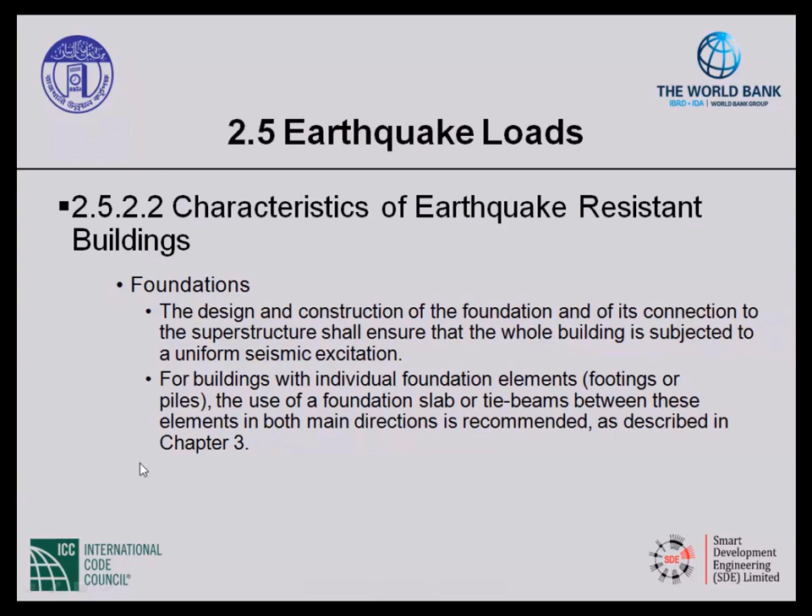Okay, regarding the earthquake loads, it is Article 2.5.3.1, in the site investigation article. It is clearly mentioned that appropriate site investigation should be carried out to identify the ground condition influencing the seismic action. Generally, for site investigation in Bangladesh, we generally practice or perform only SPT, standard penetration test.

When you consider any seismic activity or anything related to dynamics, you have to also carry out additional investigation, like PS logging, sometimes called the downhole method. Sometimes you have to also perform CPT, cone penetration test, as well as SPT, and also sometimes SCPT, seismic CPT. So all these along with SPT - SPT, CPT, seismic CPT, and PS logging or downhole - are required to establish the site parameters to make the modeling for the soil part.

Generally for buildings we model, but for soil you need to also model. You can perform one-dimensional modeling, or 2D or 3D modeling, depending how much data you have. For one-dimensional modeling it's very common to use the program called Shake, and for 3D model generally we can use Plaxis 3D. There are other software also, but these are very common for modeling soil behavior. The input required is generally obtained from SPT value, CPT value, seismic CPT value, and downhole or PS logging parameters.

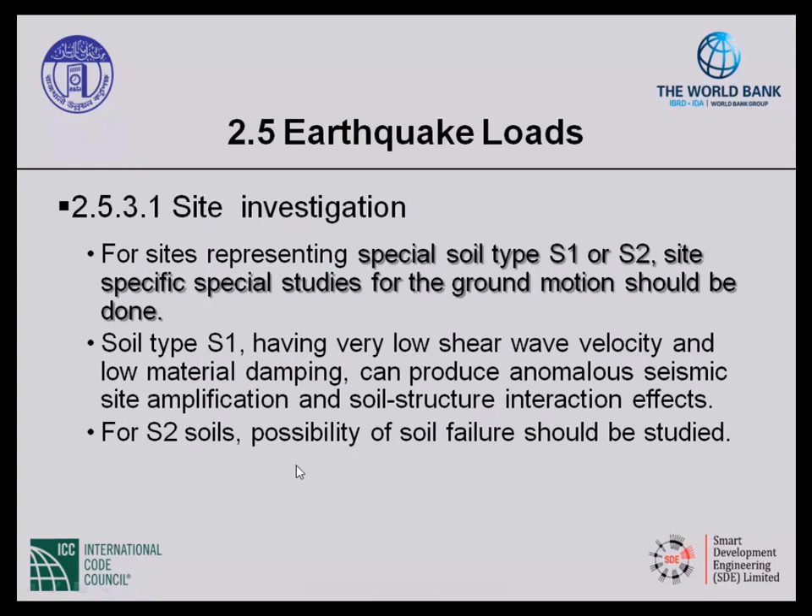In site investigation, for a structure belonging to seismic design category C or D, which is related more with structure, as mentioned in article 2.5.5.2 on seismic design category C and D, site investigation should also include determination of soil parameters for the assessment of the following. For category C and D, later we'll see that for Bangladesh, almost 70-80% of the country will fall in C and D category according to article 2.5.5.2. So for those, you need to perform the following.

You need to perform slope instability and liquefaction potential assessment. Differential settlement has to be assessed, surface displacement due to faulting or lateral spreading if faulting is present, and lateral pressures on basement walls and retaining walls due to earthquake ground motion. When you design basement walls, you have to consider the lateral pressure and also the earthquake ground motion to assess that.

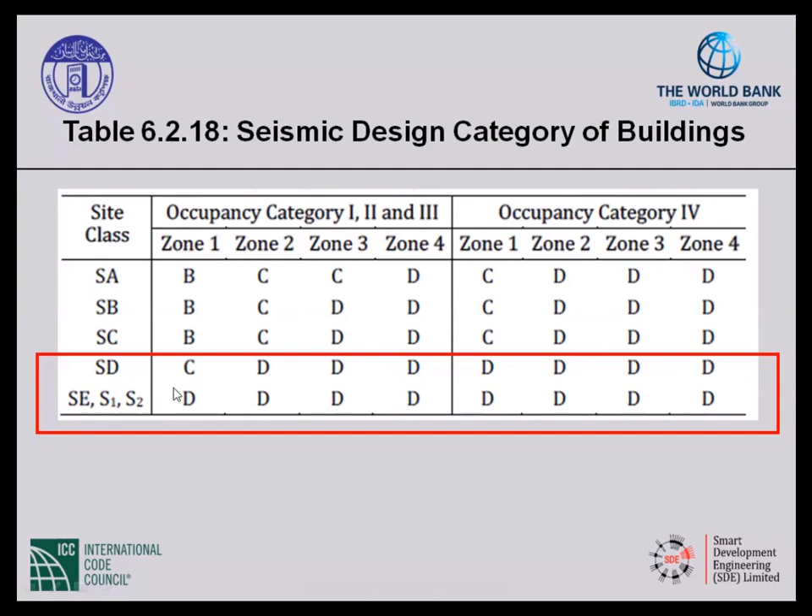If you look at the seismic design category of buildings, you'll find that for all site class types, the last two lines for all occupancy categories show that C and D type are recommended. That means the steps mentioned - site investigation should include determination of soil parameters for assessment of slope instability, liquefaction assessment, differential settlement, surface displacement, and lateral pressure on basement walls - have to be ascertained or determined.

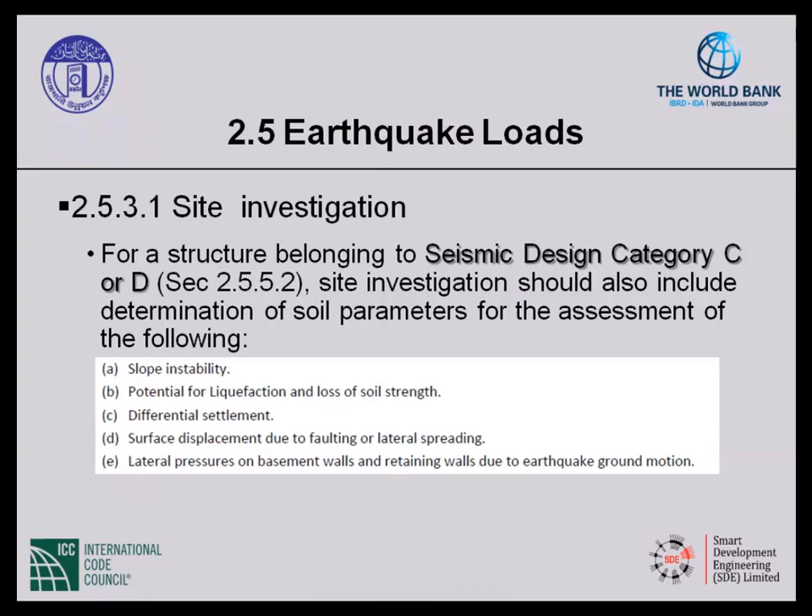For earthquake loads, it is clearly mentioned that liquefaction potential and possible consequences should be evaluated for design earthquake ground motion consistent with peak ground accelerations. So it is clearly mentioned.

But as I mentioned, the building code does not clearly specify what the surface PGA will be. They have only mentioned the 2,475-year return period ground motion in the rock. But sometimes you also need to get the return period PGA value of rock at 475 years, and sometimes you need to estimate the PGA value of rock at 200-year return period. So I will also try to show you how to ascertain or obtain these values from earthquake data, for 200-year and 475-year return period PGA values for rock sites.

It is also mentioned that any settlement due to densification of loose granular soils under design earthquake motion should be studied. That means sometimes due to liquefaction, the soil will settle, so you have to take some measures to improve that ground as well.

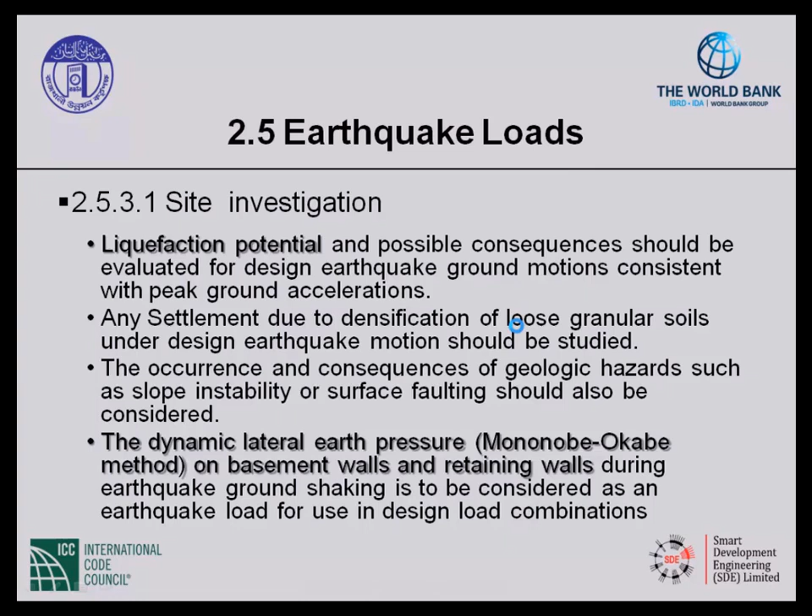Okay, next comes site classification. This is also discussed, but I will discuss this because it will be required for this part of the presentation. The site will be classified as type SA, SB, SC, SD, SE, S1, and S2. Based on the provision of this section, classification will be done in accordance with table 6.2.13.

This is based on the soil properties of the upper 30 meters of the site profile. In many countries, and in Bangladesh as well, probably a couple of years back, people used to perform shear velocity measurements only up to 30 meters, obtaining VS30.

There are two methods to estimate site amplification or site response analysis. One method, which is a little easier, uses the average shear velocity for the top 30 meters to directly estimate the site amplification factor. But many times it has been found that the VS30 value obtained from the top 30 meters does not always give the proper site amplification value at the surface.

So sometimes, for deeper sedimentation layers, you need to perform shear velocity measurement up to at least a shear velocity of 400 meters per second. In Dhaka and many regions, this layer exists up to 200 or between 200 to 300 meters depth. In other regions, like Padma Bridge site or Rooppur power plant site, this layer of 400 meters per second or more exists below 120 meters.

In Dhaka it varies from 200 to 300 meters, but in other regions it varies depending on the location of the engineering bedrock. In Bangladesh's building code, BNBC, rock soil is defined as having shear velocity greater than 800 meters per second. But when we consider engineering bedrock, it is generally defined for residential buildings.

Engineering bedrock is defined as existing at around a shear velocity level of 400 meters per second or more. But for a power plant, it is generally defined based on 600 meters per second, because the real rock is very deep. Achieving the real rock, meaning the shear velocity of real rock, consumes a lot of time and investment, so sometimes engineers do not go up to the rock. They prefer engineering bedrock, which is defined in many classifications and reports all over the world.

For residential buildings, engineering bedrock is defined as 400 meters per second. For important structures like power plants, it is defined as 600 meters per second. For other structures like bridges, it is defined as 500 meters per second. So there is some difference between the engineering bedrock and the rock defined in our code.

Now the following equations are generally used to estimate the average shear velocity. When performing the shear velocity calculation from the top 30 meters, we need to follow three criteria: first, average shear velocity determination; second, average SPT value determination; and last, average undrained shear strength determination.

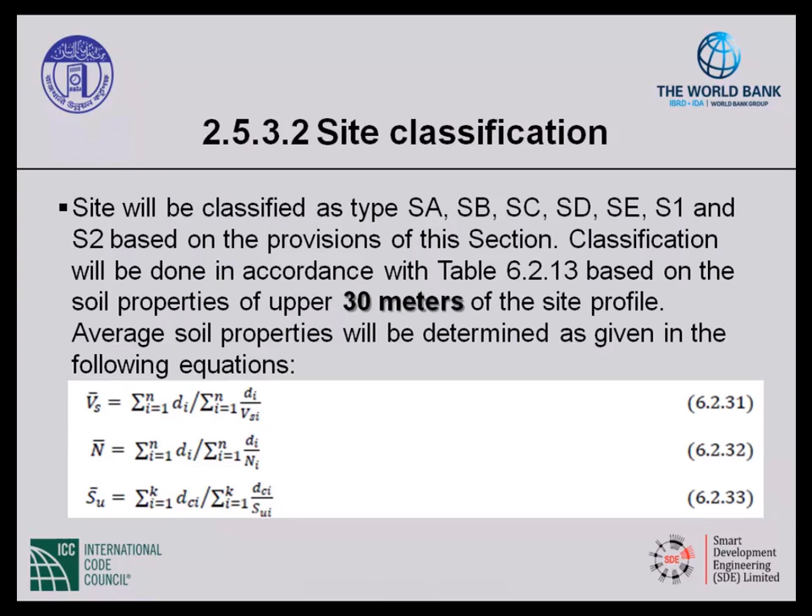For site classification, the site profile up to a depth of 30 meters is divided into n number of distinct soil or rock layers, as mentioned in the equation. Some layers may clearly mention whether cohesive layers exist within cohesionless soil, and how to handle that. But it doesn't matter, because whether it is cohesionless or cohesive soil, you have to determine the shear velocity layer by layer.

Generally, we perform shear velocity or downhole method measurements at each 1 meter, but most of the time it is performed at each 2 meter level. If you have the money and time, then you can perform it at each 1 meter.

We can segregate the sand layer and cohesive and cohesionless soil layer, and average the value. The standard penetration value N is directly measured in the field without correction, and the average SPT-N value, calculated using those equations, does not need any correction. That is what the code recommends.

The site classification should be done using average shear wave velocity VS bar for the top 30 meters, if this can be estimated. If you cannot go up to 30 meters, there are other methods recommending how to estimate 30 meters from other values. That means if your equipment cannot go beyond say 20 meters, then how to extrapolate up to 30 meters. There are lots of papers and methods mentioned, so you have to search the literature, but the code does not clearly mention this.

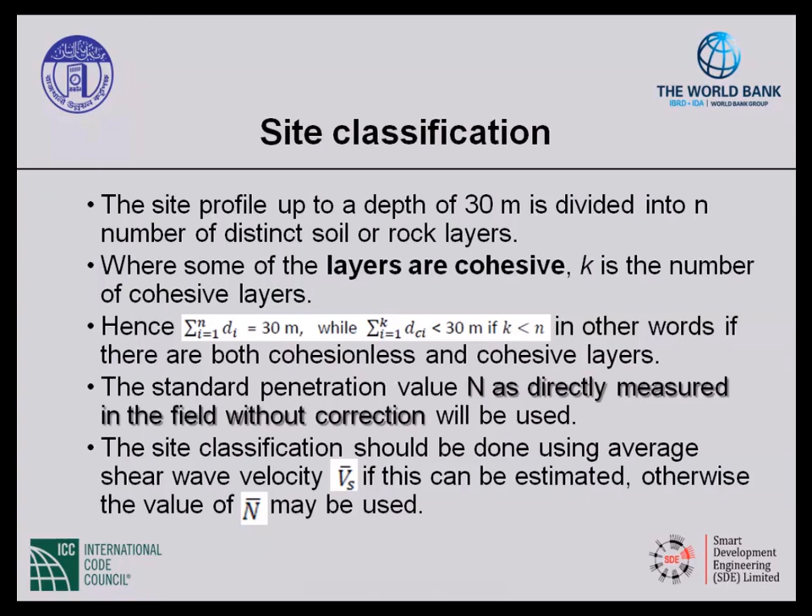Since to perform site classification and PGA value estimation we need the shear velocity, and since this is an important project, we have also carried out PS logging for the site.

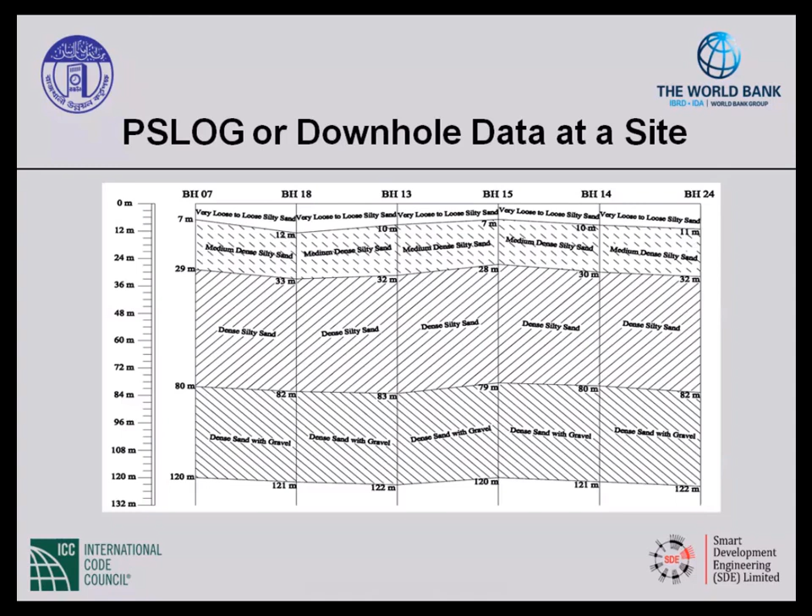But still we prefer to go up to 600 meters per second since it's a power plant project. So we have carried out shear velocity measurement up to a depth of 125 meters.

For this site, we have carried out VS30 based site amplification, and also site amplification based on shear velocity up to a depth of 125 meters. We found that the VS30 based site amplification value is much smaller than using the 125 meter VS shear velocity profile to assess the site amplification parameters.

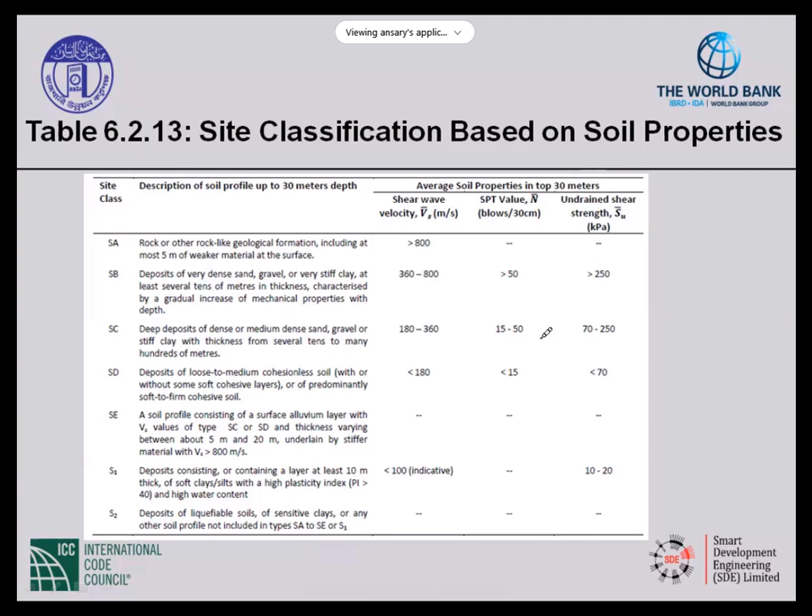Okay, then if we move to the total historical earthquake studies, because in the BNBC it is also there in the appendix. It has been clearly mentioned what our historical earthquakes are. But over here, just to show...

The major earthquakes in Bangladesh are basically the 1762 Chittagong earthquake, which also caused a tsunami in the Chittagong-Arakan region back in 1762. That is one of the largest historical earthquakes, which happened almost 250 years back. But this kind of earthquake generally occurs once every 300 years. So since it happened in 1762, probably it will happen again around 50 years later.

But the smaller earthquakes like the 1869 Cachar earthquake, the 1885 Bengal earthquake, the 1918 Srimangal earthquake, the 1923 Durgapur earthquake, or the 1930 Dhubri earthquake, which are around magnitude 7, can happen every 100 to 150 years. So the return period for this kind of earthquake is generally 100 to 150 years.

But all those earthquakes which are larger, greater than magnitude 8, generally have a return period of 300 years. Like in 1897 - if we say it happened around 1900 - then the next large earthquake, the probability of occurrence, is probably around 2200.

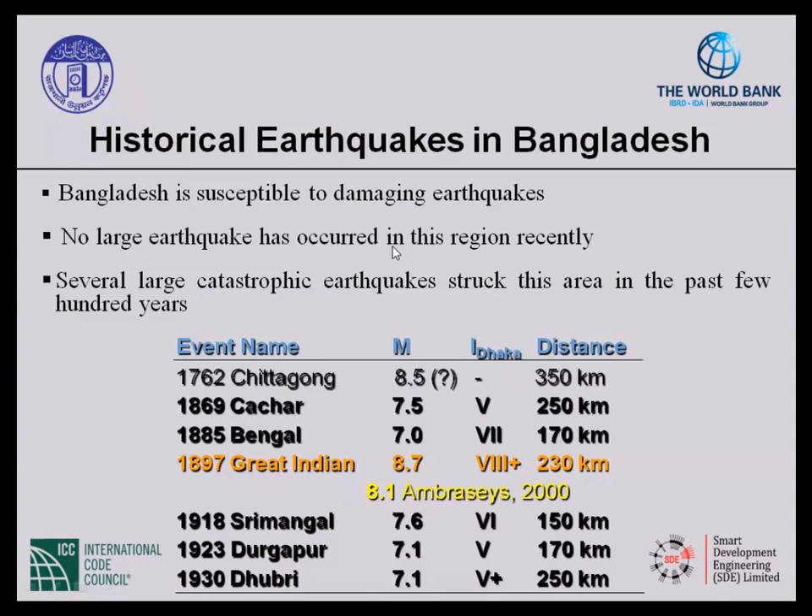Okay, so these are all the large earthquakes in and around Bangladesh. Many of you may wonder that most of these earthquakes are lying outside Bangladesh. But if you see more minutely, you will find out that there are at least 10 earthquakes having a magnitude between 6 and 7 which lie within Bangladesh.

And most of these occurred a long time back. So for the last probably 100 years, no larger earthquakes have happened in Bangladesh. But smaller level earthquakes - we do not have much data on these within our country.

One of the reasons is we do not have adequate equipment. Although the Bangladesh Met Department installed probably 4 equipments in 2001, out of those 4, at least 2 are out of order.

So they cannot exactly pinpoint, like the recent Sylhet earthquake - they cannot exactly pinpoint the location of those earthquakes. So we have to rely on the United States Geological Survey, or we have to rely on the Indian Met Department to locate those earthquakes.

But at the international level, if you search the database of the International Seismological Center, or look at the USGS website - since we do not have sufficient seismometers, although we have 4, 2 are out of order - the smaller earthquakes happening within our country are not measured that well.

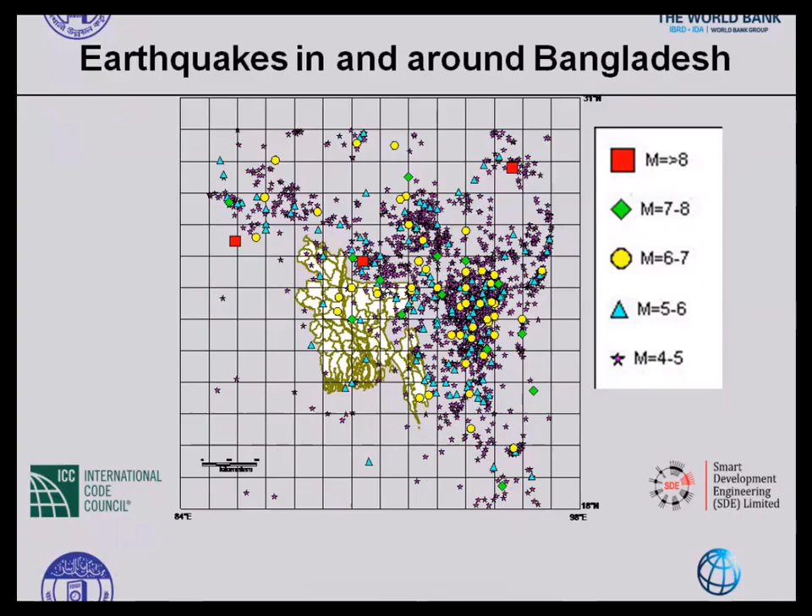The first one, where we are estimating the magnitude value for that particular Sylhet site, we have to gather all the earthquakes within the 300-kilometer radius, and we have to make a correlation between magnitude and occurrence rate.

That means we have to first consider, say, our database within a 300-kilometer radius has 150 earthquakes. Within those 150 earthquakes, we have to segregate how many are between 3 and 4, how many are between 4 and 5, how many are between 5 and 6, how many between 6 and 7, how many between 7 and 8, and how many greater than 8.

Next comes section 2.5.4.2, seismic zoning. In our code, it is clearly mentioned that the intent of the seismic zoning map is to give an indication of the maximum considered earthquake motion at different parts of the country. In probabilistic terms, the MCE motion may be considered to correspond to having a 2% probability of exceedance within a period of 50 years.

So generally, the basic equation — I don't know whether I can write it or not — the probability equation equals 1 minus e to the power of... it's very difficult to control this WebEx thing. I will write it here.

Probability equals 1 minus e to the power minus nu t. This nu is the occurrence rate. Although it is mentioned 2% probability in a period of 50 years, this 50 years is basically t.

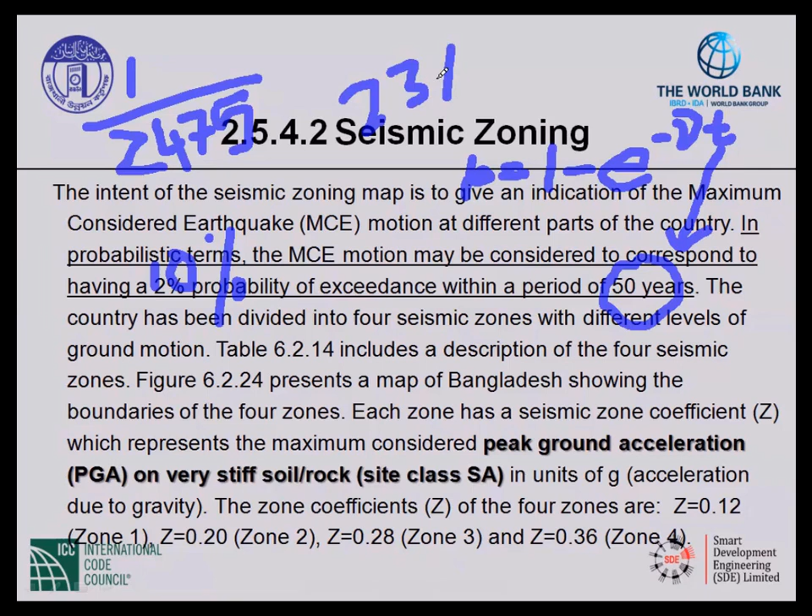Similarly, if probability is 10% in a design life of 50 years, it is 475 years. If we put probability value of 23%, it means a return period of 200 years. So 2% probability of exceedance means 2475 years, 10% probability means 475 years, and 23% means 200 years return period.

But for a design life of 50 years, for the structure we are designing, we assume its design life will be 50 years. So for any return period, we can always convert to the probability of exceedance using that particular equation.

In our code it is clearly mentioned that the intent of the seismic zoning map is to give an indication of the maximum considered earthquake at different parts of the country. In probability terms, this MCE may be considered to correspond to having a 2% probability of exceedance within a period of 50 years, which means 2475 years.

Each zone has a seismic zone coefficient Z value, which is basically the PGA value at the rock, representing the maximum considered peak ground acceleration on very stiff soil or rock, classified as SA type, in units of G, and it is always expressed in percents of G.

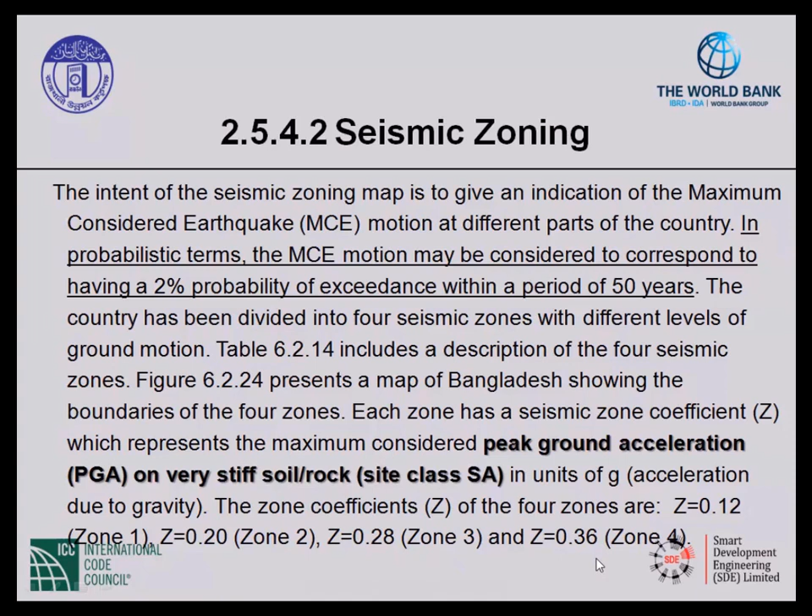The zone coefficients of the 4 zones are Z equal to 0.12 for zone 1, 0.2 for zone 2, 0.28 for zone 3, and 0.36 for zone 4. But all of them have to be multiplied with a factor of G, since they are expressed with respect to G value.

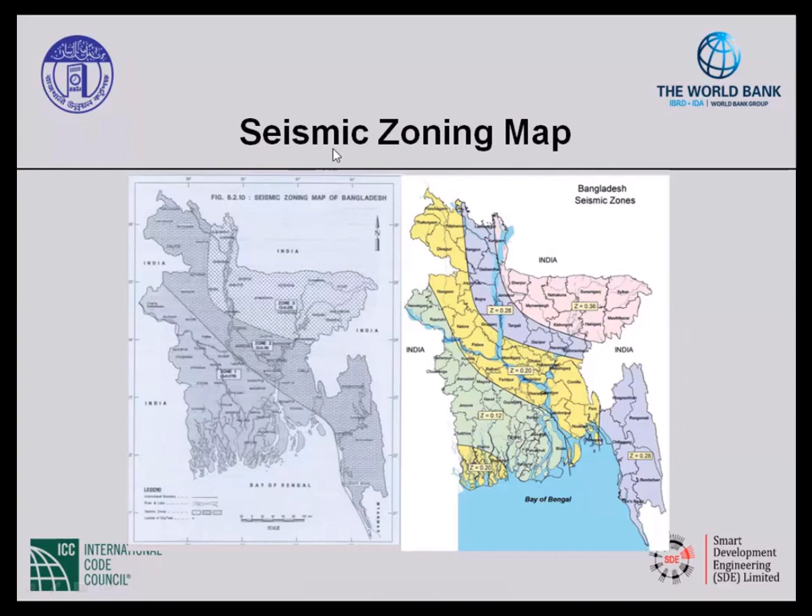It is also mentioned, as noted, table 6.2.14 and the design response spectra are important because we need to estimate them. These are design spectra and other spectra that are defined, but we need to modify them if we want to estimate or develop the time history data for a particular site. We need to first identify which response spectra we have to use.

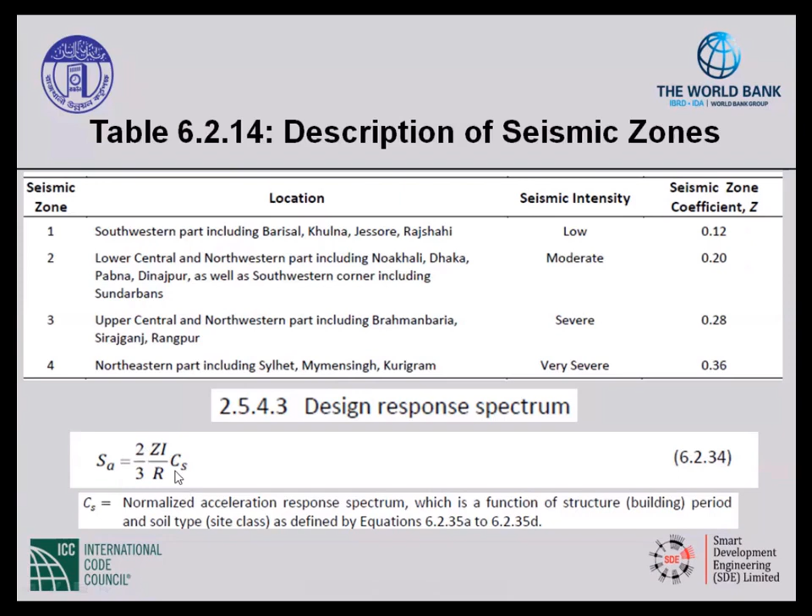For this, the shear wave velocity profiling or site classification is essential. These are already discussed by Dr. Ghosh and others, like the Z factor and importance factor are another issue. I will describe in more detail. First, I will go into the response spectra curve, then come back here.

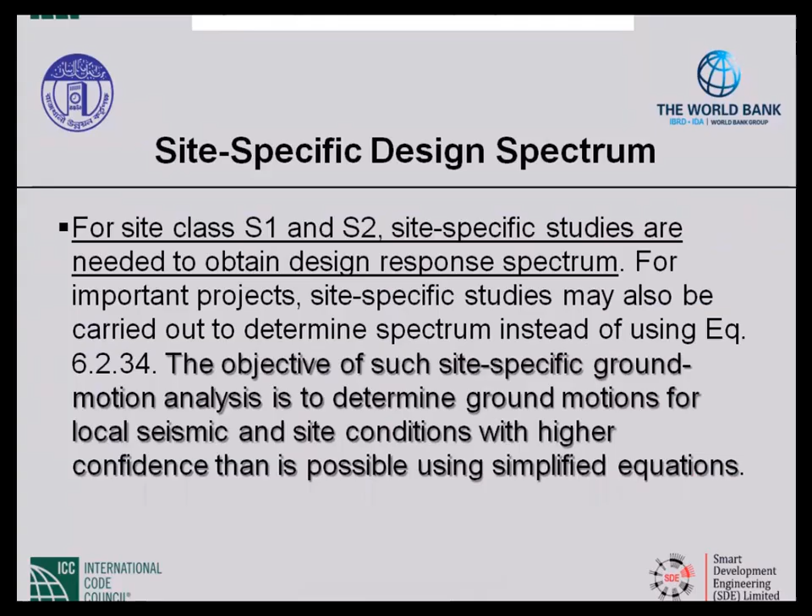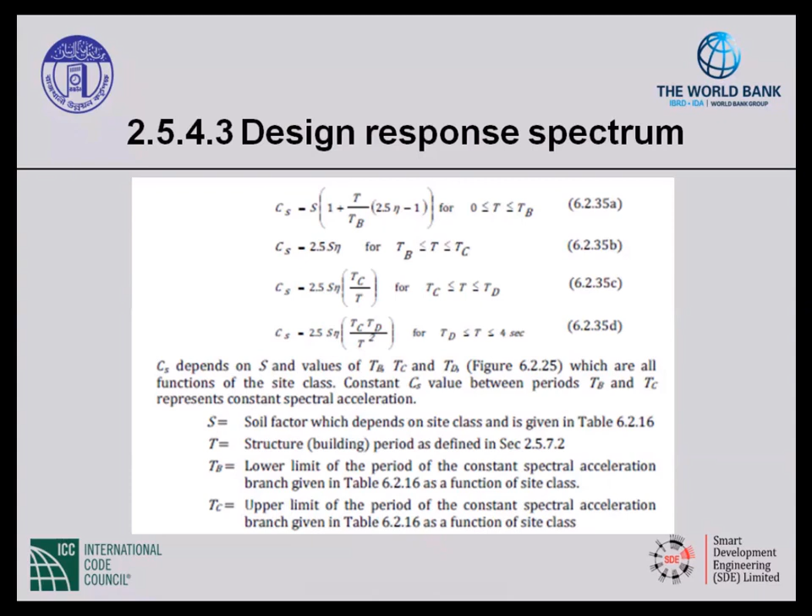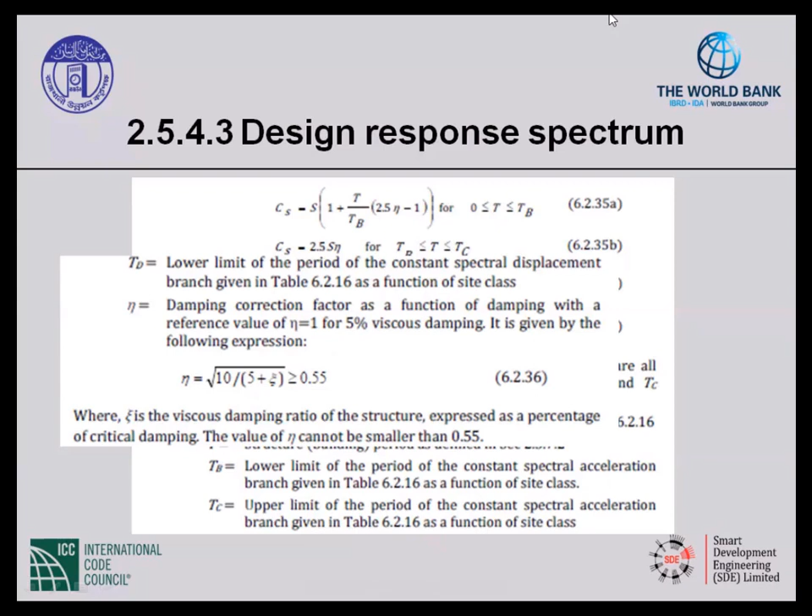The soil factor provided in Table 6.2.16 is there, and T of structure for that value is also provided there. But using these 4 equations, you can estimate it, and all these are only applicable for 5% damping. It's clearly mentioned because for structures we generally use or prefer 5% damping, and for 5% damping, the η value is 1.

The η factor provided in this equation can be assumed as 1, since we always use 5% viscous damping for our structures. It is very common practice. So these 4 equations can be used.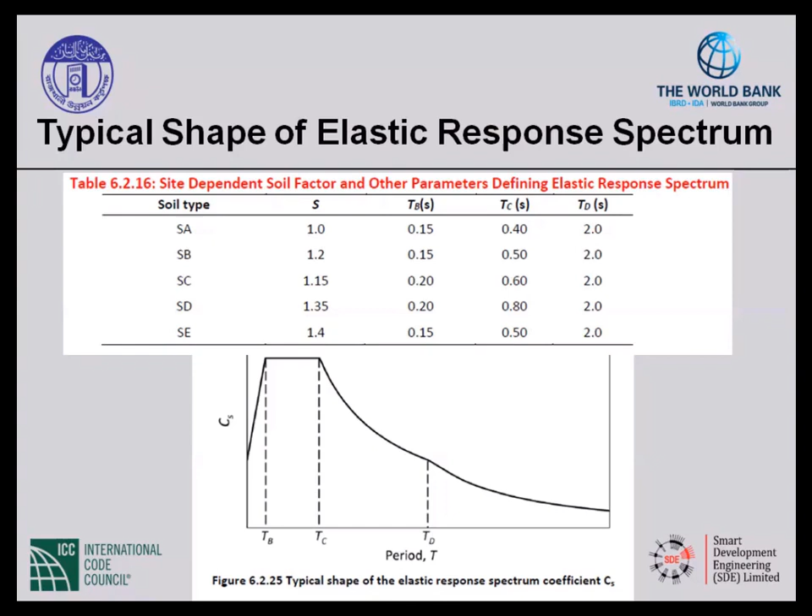For other structures, we can use the SA, SB, SC, SD parameters, where S is the soil factor, and TB, TC, TD are already provided in the curve below, representing the typical shape of the elastic response spectra. From this, we can get these 4 types of response spectra.

But here the value given is a normalized value, like spectral response divided by PGA rock. That PGA rock value comes from our building code seismic zonation map.

Then you have to multiply with the normalized value to obtain the SA, SB, or SC value. The site classification is already defined by shear wave velocity, and using the VS30 value, you can estimate whether the site falls under SA, SB, SC, SD or SE type, and multiply accordingly. Say our site falls in SC type, then you multiply that normalized curve with the PGA rock value, and you get the response spectra for that particular location.

But how to generate the time history for the location is not clearly defined in our code, though sometimes you need to obtain time history data for a particular site. The basis is that curve I mentioned—you multiply SC with PGA rock to get the response spectra for the site, and using that curve, you generate the time history data, as shown in this curve. There are lots of methodologies, techniques, and software available nowadays to develop this.

Especially here, there are about 2 software options available in the market that you can use.

One is earthquake risk software, developed by Berkeley or other universities in the USA, and there is also software called Seismosoft. You can also use that one.

So the target ARS, target acceleration response spectra, is what I mentioned. We can estimate it by multiplying the PGA rock from the building code curve, which is 6.2.26 for SC, and that will be our target acceleration response spectra.

And achieved ARS we have to fit. Using the target acceleration response spectra, the middle one is the target, the upper one is +1 sigma, the lower one is -1 sigma. The achieved ARS is obtained using software, by trial and error, to get a response spectra which matches the target response.

In between, we generate the earthquake time history, because to obtain a response spectra we first need the earthquake time history, and using that time history you can generate it using FFT, fast Fourier transform, or other numerical methods to generate the response spectra.

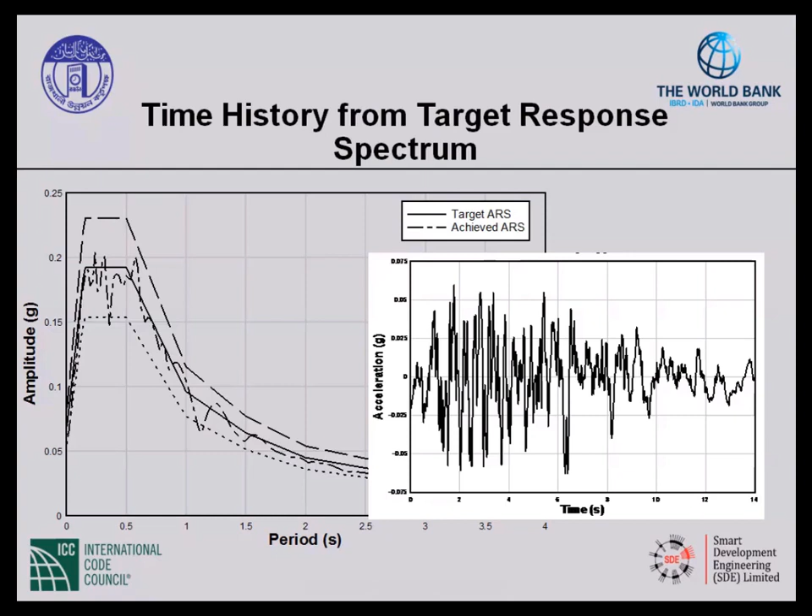So here, to generate that particular response spectra, this is the time history, and when you match these two, they are shown. The black one is the synthetic time history, because using response spectra we can use two methods.

One is using synthetic time history, meaning we can assume parameters for our local soil and local fault mechanism to generate the synthetic earthquake time history, and then match it back to the target.

Again, there are other methods where we can directly use real earthquakes, very famous ones like the Kobe earthquake, the Chichi earthquake, the Kocaeli earthquake, or the Northridge earthquake, and use that real earthquake data to match the target response.

So there are two methods: one is generating a synthetic earthquake for your own country using the fault mechanism, and the other is using real earthquake data to achieve the target response. But both methods end the same way, meaning you have to achieve the response spectra which matches the target response.

So this yellow color one is the matched one, and that will be used for your modeling for building design.

Next comes dynamic ground stability or liquefaction potential for foundation soil, covered in article 3.9.5. Everything else has been explained in detail, but I think this particular article 3.9.5 has not been touched upon, so I'm trying to explain dynamic ground stability or liquefaction potential for foundation soils.

Soil liquefaction is a phenomenon in which a saturated sandy deposit loses most of its strength and stiffness due to generation of excessive pore water pressure during earthquake-induced ground shaking. Total stress, effective stress, and generation of pore pressure have already been explained in detail, so I won't go into that.

Just remember, the two preconditions for liquefaction are: the soil generally needs to be sandy in nature or cohesionless in nature, and second, the water table has to be very close to the surface. These two are prerequisites for generation of liquefaction.

If you have a site with this condition, and you think a significant earthquake will be generated, you need to study the liquefaction analysis. Also, in our recent 2020 code, it is clearly mentioned that for soil type C and D, you have to assess the liquefaction potential.

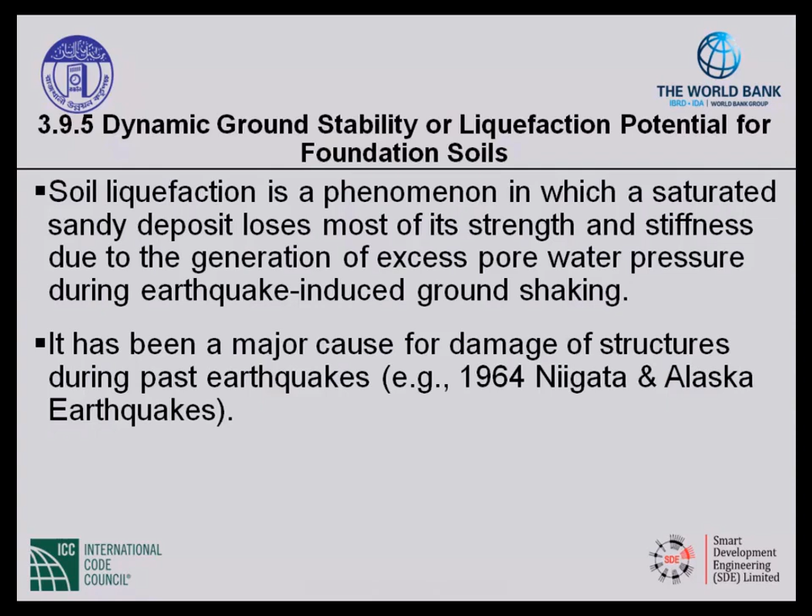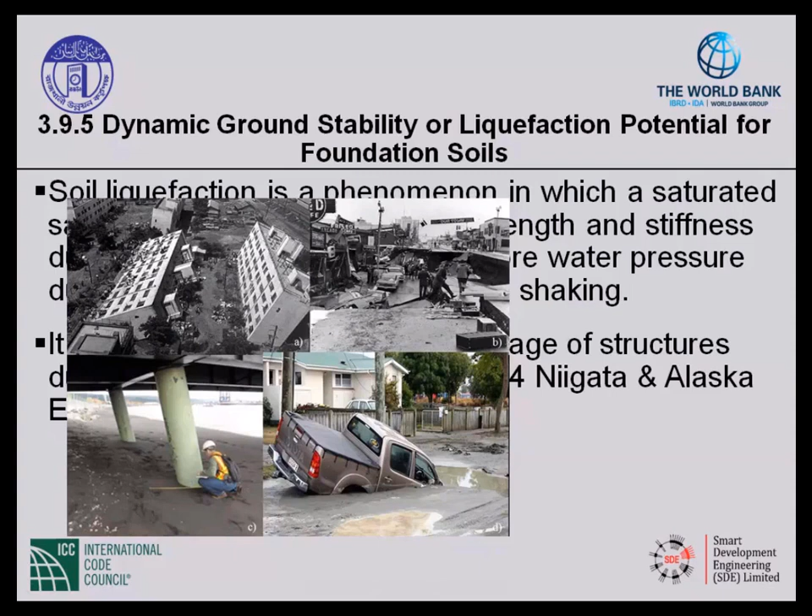In many of these locations, you can see people standing where liquefaction occurred. In liquefaction, the soil behaves as a liquid, and the sandy soil, showing very low shear strength, caved in. You have to be careful wherever you find sandy soil, generally found near river banks where recent deposits are located. Near the river, the water table is also very shallow, so these two conditions are prerequisites for liquefaction.

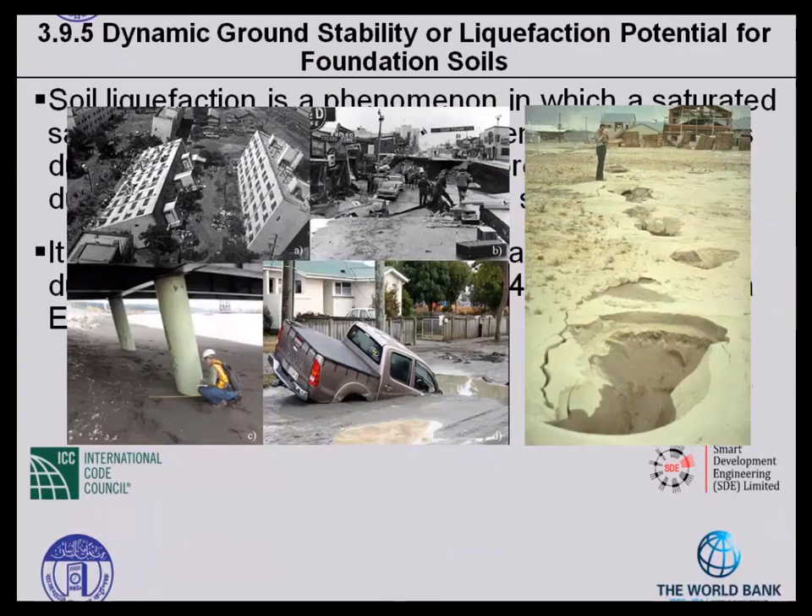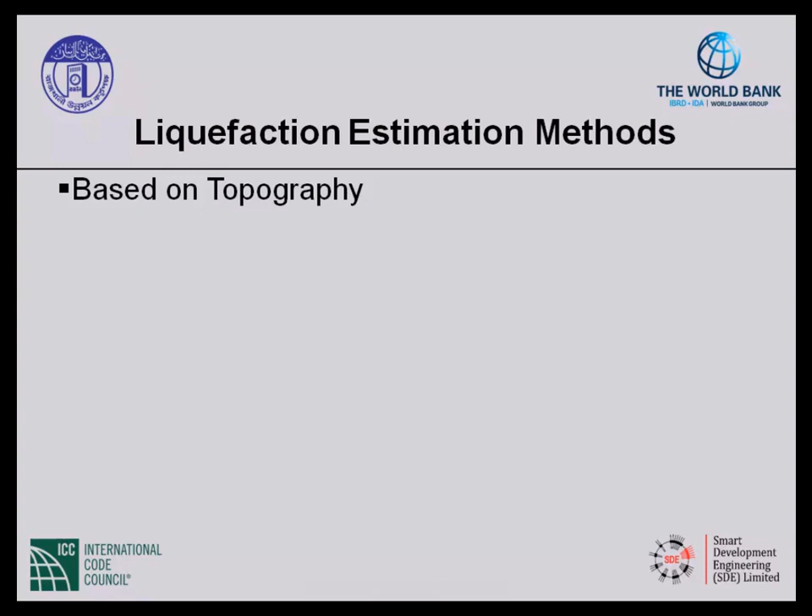If we do not have any money, liquefaction assessment can be done in many ways. If you do not have enough money, you just try to collect data from the topography and estimate liquefaction based on a topographical survey. Areas with high potential to cause liquefaction include where older river beds are, where present river beds are located, because those carry alluvial silts and sands, and lowlands between dikes with high water table, and filled lands or reclaimed lands.

Filled land and reclaimed lands mean areas where we fill ground, like government projects and private projects, many projects in Dhaka city. If you go to Google Earth and search, you will see lots of locations showing white colors. Those are all potential sources of liquefiable areas, because those areas are generally filled with reclaimed sand, using dry sand from the river.

Other areas are less vulnerable to liquefaction, and terrace hills have almost negligible or low liquefaction potential. So areas with high potential are important to us, especially older river beds, present river beds, lowlands between dikes, and filled or reclaimed areas. If we identify those areas from survey, we can say these locations are potential sources of liquefaction.

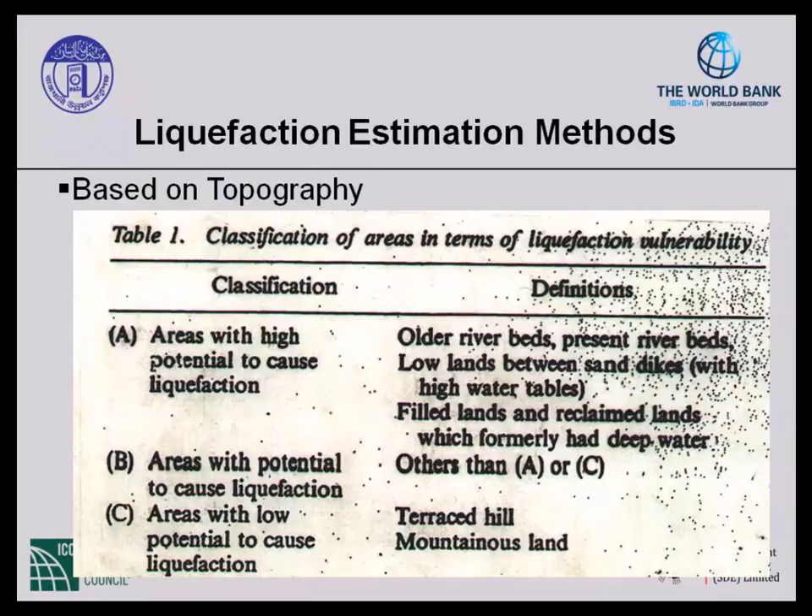If we have more money and project funding, then we perform more studies and liquefaction assessment. The most important general liquefaction procedure was provided by Professor Seed and Idriss back in 1982.

They observed in their literature, over the last 25 years from 1982 and backwards, that a procedure termed the simplified procedure has evolved for evaluating liquefaction resistance of soil. This procedure has become the standard of practice in North America and throughout much of the world. We are still using it as one of the methods.

But when we use one method, it may be sensitive to some parameters. So generally, for liquefaction analysis, we use 2 to 3 methods to compare. Three methods are very popular: we will describe the Seed and Idriss method here, but you also need to know there is one method by the Japanese Societies of Soil Mechanics and Foundation Engineering, and another method proposed by Chinese researchers, called the Chinese method.

It is also in their code. So generally, when we perform liquefaction analysis, we always compare three methods: Seed and Idriss, the Chinese method, and the Japanese method. One is US based, one is Chinese based, and one is Japanese based, because these three countries are more prone to liquefaction, having more earthquakes than other countries.

So although I'm showing only one method, when you use this in the real world for consultants or other projects, you always need to compare three methods, so you know the sensitivity or limitations of the other methods also.

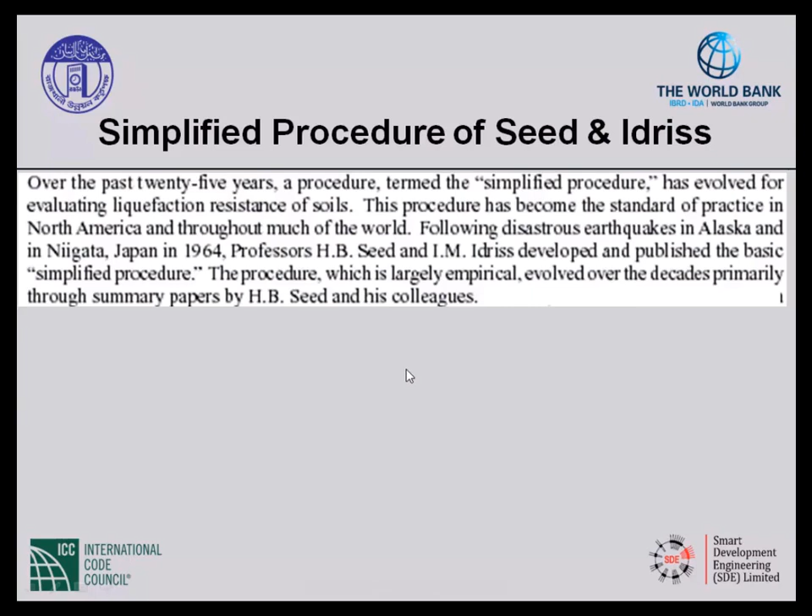The procedure, which is largely empirical, evolved over the decades primarily through summary papers by H.B. Seed and his colleagues. They clearly estimated the factor of safety for liquefaction potential, defined as R over L, where R is the in situ resistance of soil, expressing the capacity of the soil to resist liquefaction, sometimes called CRR. And L is the earthquake load induced by seismic motion, defined by CSR.

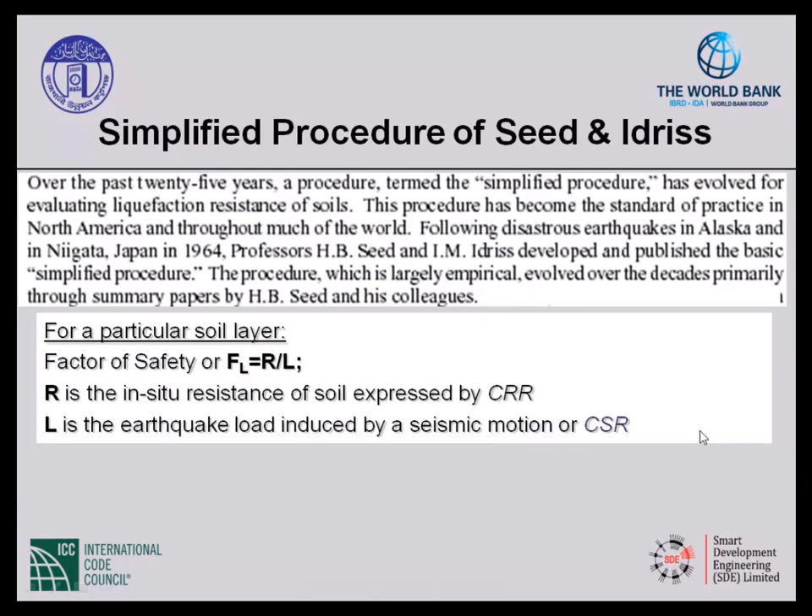If the factor of safety FL is less than 1, liquefaction is said to take place. Otherwise, liquefaction does not occur. The factor of safety obtained in this way is generally used to identify the depth to which liquefaction is expected to occur in a future earthquake.

This information is necessary if countermeasures are to be taken in an in situ soil. That means if you estimate liquefaction susceptibility for a site and the assessment shows it is susceptible, you have to consider some soil improvement measures, because when future structures are built, they may settle. So before that happens, we have to improve the soil so that when an earthquake occurs in future, the soil is improved sufficiently that the structures remain intact, with no collapse and no settlement. So this is the issue.

In more detail, to illustrate the influence of magnitude scaling factor - magnitude has a significant effect. Although I'm showing one equation for magnitude calibration, there are numerous equations for this. In the Seed and Idriss method, for a magnitude of 7.5, the MSF value is generally considered to be 1. But if the magnitude is higher, the MSF value is lower, and if the magnitude is low, the MSF value is higher, meaning less liquefaction susceptibility.

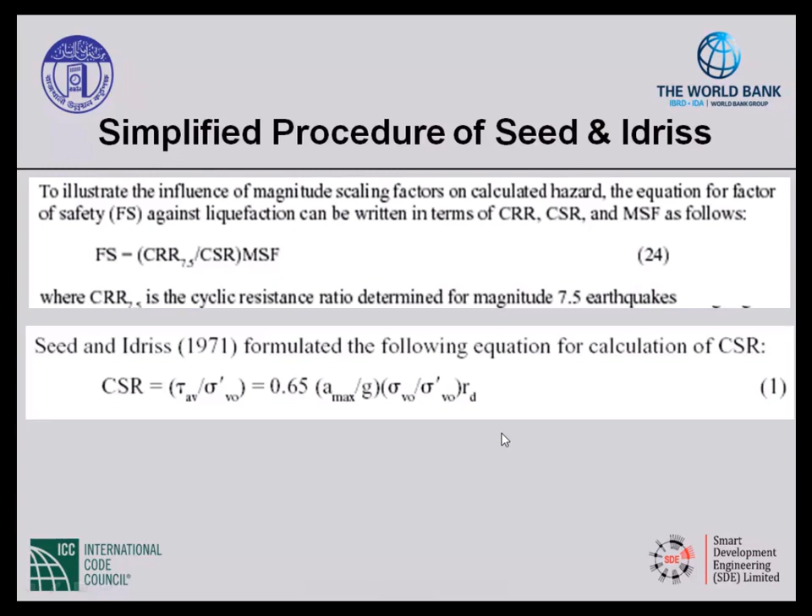The RD value - Professor Seed and Idriss gave a different RD equation, but here it has been taken from a more recent study, back in 2001, where a workshop brought together very famous people who convened and decided on these equations. That means they improved upon Seed and Idriss's simplified procedure, and it is called NCEER.

NCEER developed this in 2001, and proposed that if the depth Z is less than 9.15 meters, we should use the RD reduction factor equation: 1 minus 0.00765 times Z. Then if Z is between 9.15 meters and less than 23 meters, you use a different equation. But generally for liquefaction, it has been observed that beyond 20 meters, due to high overburden pressure, there are very few locations where liquefaction occurs. That's why liquefaction studies are generally performed only up to 20 meters.

From this figure, you can see the BNBC provides the PGA value at the base, but we need to estimate the PGA value at the surface. For that, you need to know the soil layer properties, the location of the water table, and many other parameters.

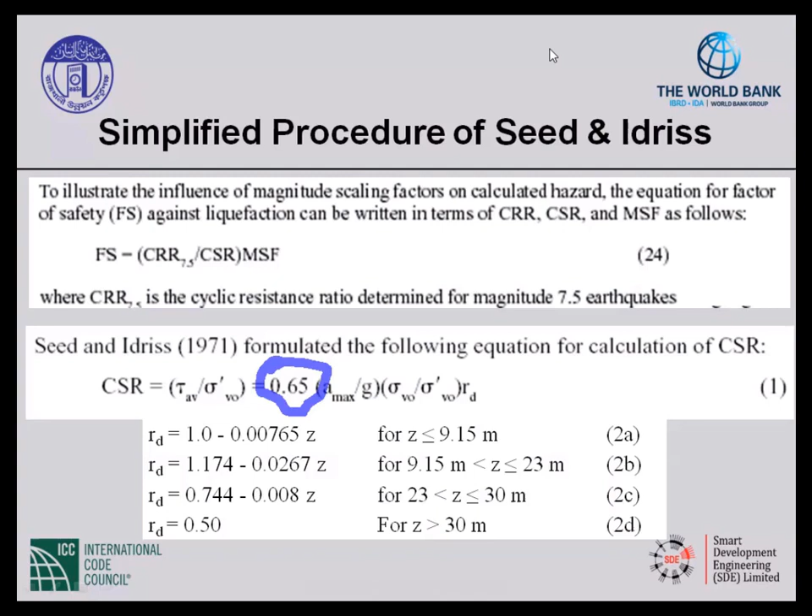One important thing to mention: the factor 0.65 is important because the Amax value obtained from the time history data is pretty high, and it is generally just one pulse. But the other acceleration values are generally much smaller. So it is a reduction factor to reduce the max value, because otherwise the PGA value obtained at the surface would be much higher. But since it is not sustained for the whole time - as you can see from the figure, there is only one pulse and it's not sustained for the whole time period - it is better to reduce the PGA value using that factor of 0.65.

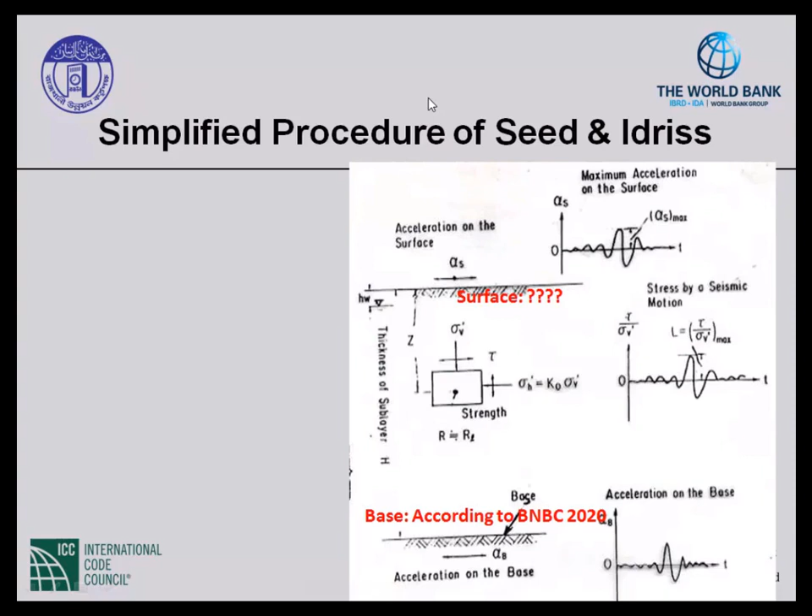So site response analysis of a site may be carried out to estimate the site amplification factor. That's why, to obtain the surface PGA value from the bedrock value, you need to carry out the site amplification factor analysis, which requires estimating dynamic parameters such as shear modulus and damping factor.

The site amplification factor is required to estimate the amax value. To estimate it, site response analysis needs to be carried out, but it is not an easy job, because you also need to estimate dynamic parameters like shear modulus and damping value.

But the interesting thing is, all over the world, so much research has been carried out and so many curves have been generated for sands and clays for different countries, that we can always use that, because to generate and develop our own dynamic parameters for shear modulus and damping will take a lot of time.

Although for two sites, the Padma Bridge site and the nuclear power plant site, we have generated those, but it took a lot of effort. Each of those sites also allowed us to provide a master's degree for one student each, for Padma site one student and for the Rooppur site another, because so much data was generated to develop those dynamic parameters that such a degree could be awarded.

So generally, if we do not have the parameters, all the software we typically use have those curves inbuilt, and you can use those, no problem. There will be some changes if you want to do a surface study, but obtaining those dynamic parameters is a cumbersome and time-consuming job. So for very important structures like nuclear power plants or long bridges, you can do that detailed work.

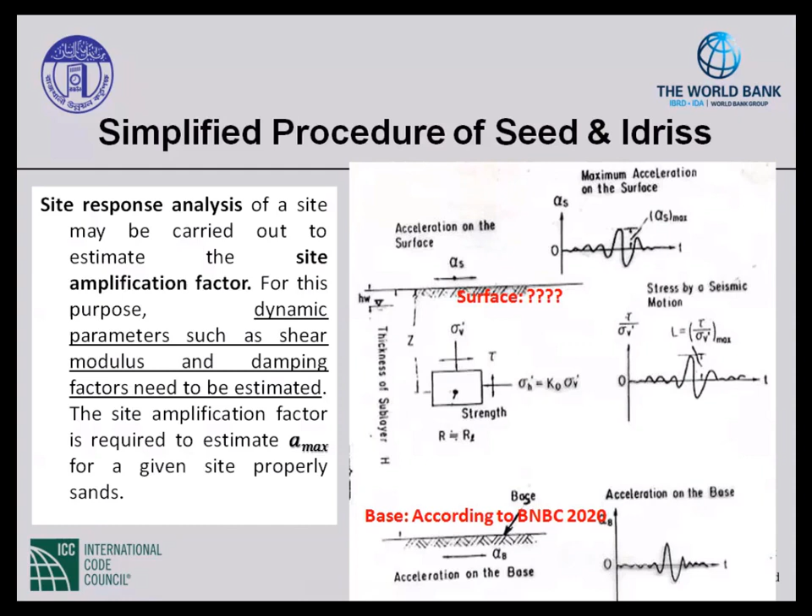But for other structures where site-specific study is required, you can use already established dynamic curves like modulus versus strain and damping versus strain curves, already provided in the software.

Then again, you need to provide layer-wise data like shear velocity and density value for all the layers, and then perform one-dimensional response analysis. If you provide that, you will get the surface level PGA value for the particular site, because the PGA value at the rock site is generally, in most cases, amplified. Sometimes it is de-amplified, but in most cases it is amplified.

If we put an input value of 0.15 G, it will become around 0.27 G or sometimes more. So it's also shown here: since we input 0.15 G for this particular site, it increased to 0.27 G. So PGA value at the rock is 0.15, PGA value at the surface is 0.27 G, and using that 0.27 G we need to perform the liquefaction step.

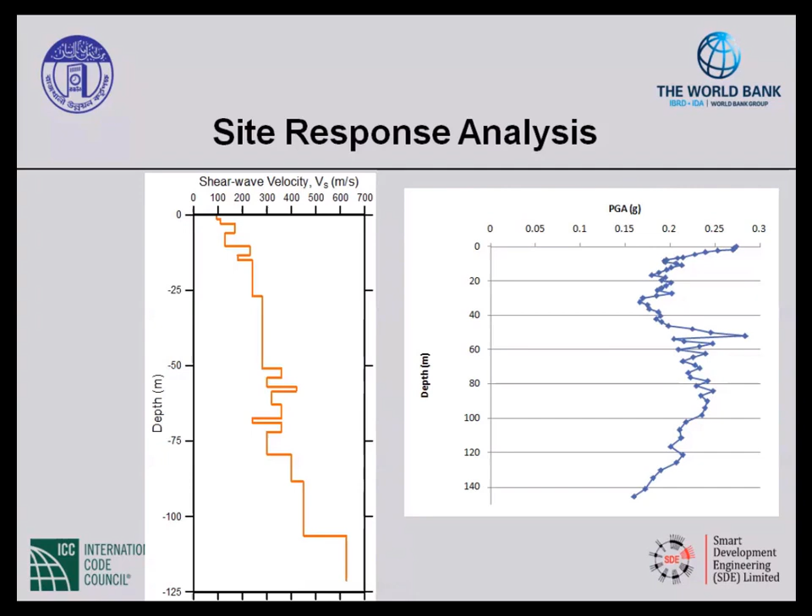The second step is to determine the cyclic resistance ratio of the in-situ soil. We discussed the loading, and now this second step determines the cyclic resistance ratio, which represents the liquefaction resistance of the in-situ soil.

The most commonly used method for determining liquefaction resistance is to use data obtained from the standard penetration test, because it is very common. Professor Idriss developed that method, and later, back in 2001, the NCEER report combined and enriched it.

For nuclear power plants, we need to perform cyclic triaxial tests earlier, but it's a very cumbersome process, taking almost 6 months to develop. The test itself is not very time consuming, but gathering and processing the data is very time consuming. So generally, most cases prefer SPT values, but for very important structures like nuclear power plants or bridges, we can do cyclic testing. In general cases, though, we either use SPT based or CPT based methods.

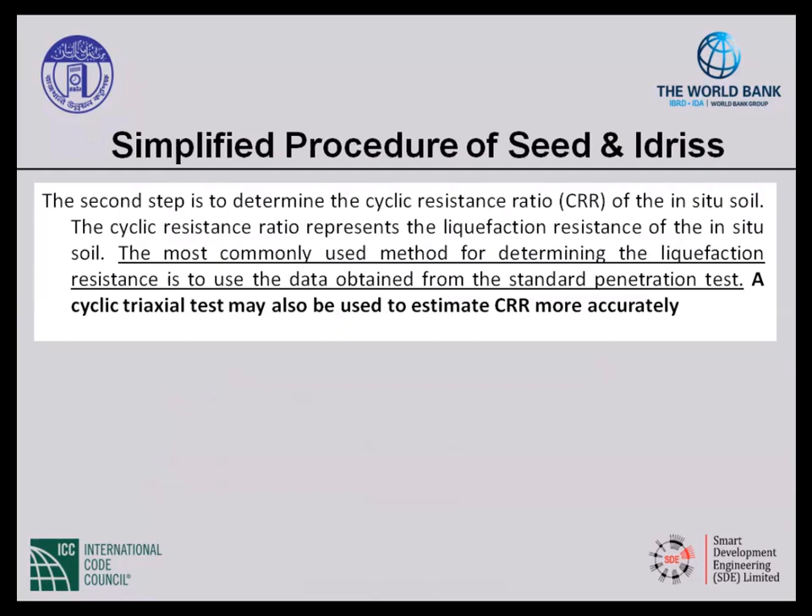For fine grained soil, I think there is some mistake in the equation provided in the building code. Just before this presentation started, one of my students called me and showed that there is some mistake. But we don't use that much, although the code shows it, mentioning that Professor Finn stated that if the soil is finer than 0.005 and its percentage is less than 10%, fine content less than 10%,

then the soil is susceptible. The liquid limit has to be less than 36%, and natural water content and liquid limit, these should be greater than a certain ratio. In the code, I think there is some mistake, they show it as less than 0.9 and 0.75. So we probably need to correct this in the code at a later stage.

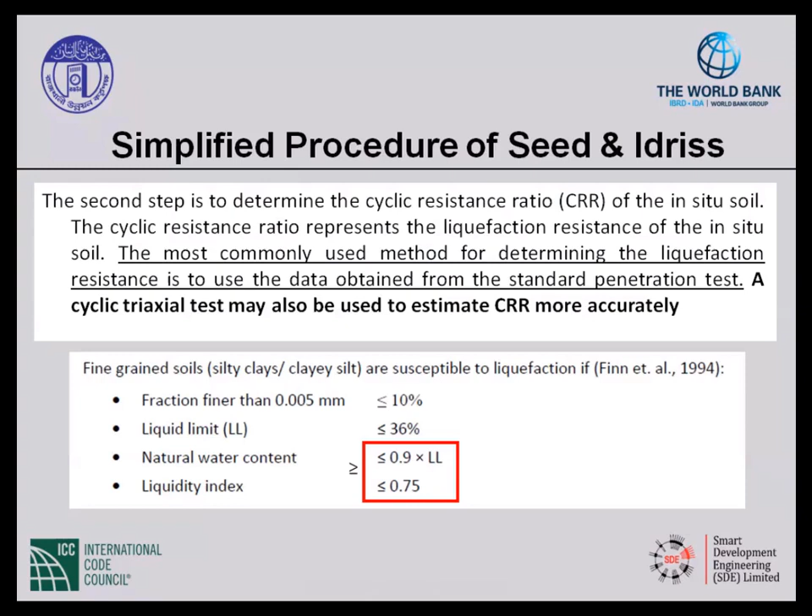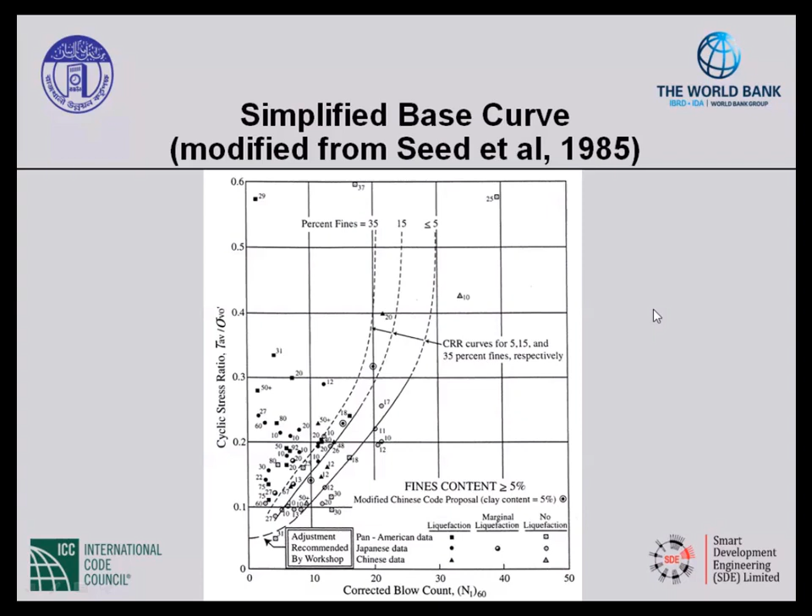So these are some changes. Correcting SPT value for silty sands to an equivalent clean sand, because we'll have more pure sand or clean sand. That's why for silty sand, you have to increase the SPT to take care of that issue, meaning an increase of the resistance value. So that means more SPT value, more resistance.

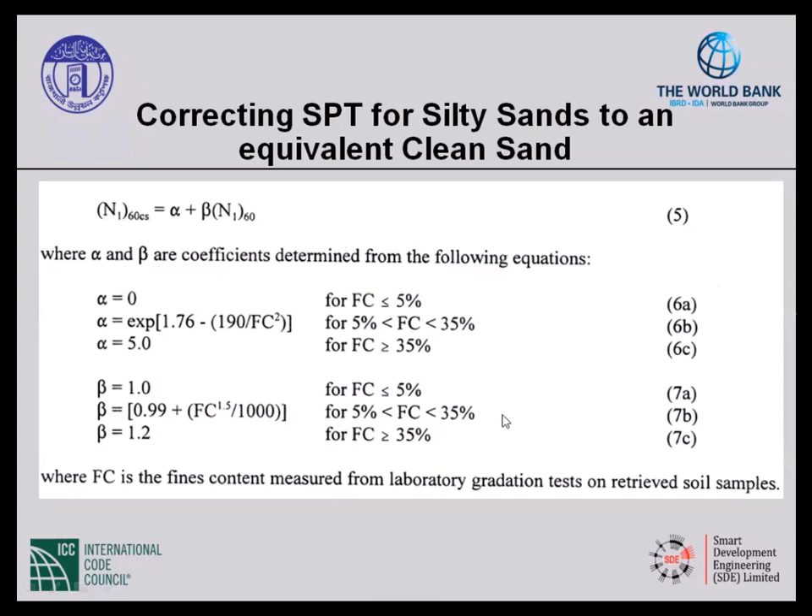Then comes Professor Iwasaki's method, back in 1982 and 1984. It is a suitable method because, unlike Professor Seed's method which only mentions liquefaction potential for a particular layer, we generally estimate liquefaction susceptibility for each 5 feet or 1.5 meters.

But if you want to know the liquefaction potential of a whole borehole, you need to know the liquefaction potential index up to a depth of 20 meters. Professor Dr. Iwasaki, in his numerous papers published from 1982 to 1986, released several papers, one of which, the last, was published in Soil Dynamics and Earthquake Engineering back in 1996.

In the 82 method, clearly mentioned in the initial paper, the liquefaction analysis by means of the liquefaction potential index defined by Iwasaki et al. is different from the simplified procedure of the Seed-Idriss method, because Seed-Idriss always clearly mentions liquefaction susceptibility for a particular layer of each 1.5 meters.

But Iwasaki defined the simplified procedure to predict what will happen to a soil element, whereas the index LPI predicts the performance of the whole soil column up to a depth of 20 meters. That means if you want to make a microzonation map for a city, or study a whole site altogether, you need to know the result for the whole soil column up to a depth of 20 meters.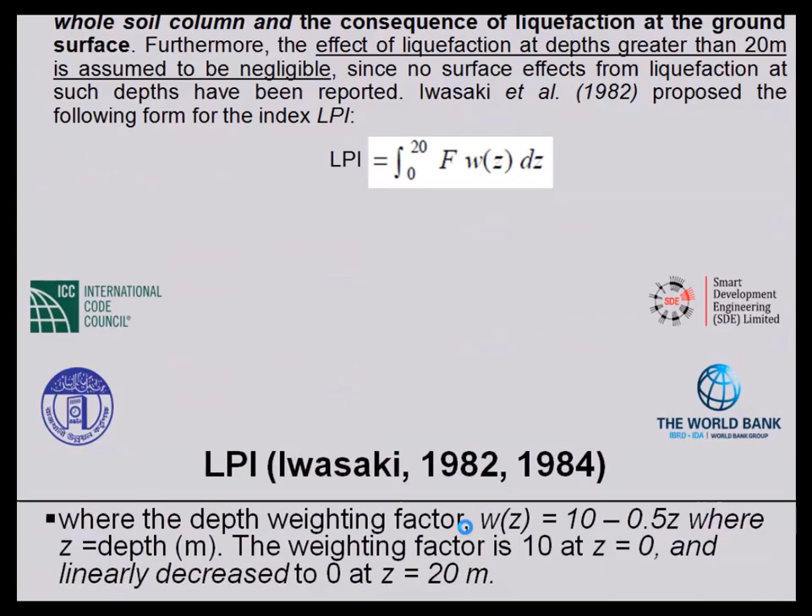In the equation, there are two parts: one is F times W, and one is DZ, which is the thickness, generally taken as 1.5 meters for each layer. So one is F value, one is WZ, one is DZ. DZ is fixed at 1.5 meters. F will be dependent on 1 minus FL, which I will come to, and WZ is again another factor showing the depth factor.

Iwasaki clearly mentioned the depth weighting factor WZ equals 10 minus 0.5Z, where Z is the depth. The weighing factor over Z: when Z is 0, WZ is 10. When Z is 20 meters, WZ would be 0.

The variable F, which is the key component, is dependent on the FL value determined by Seed-Idriss method or any other method, giving 1 minus Fs. This Fs is basically the susceptibility factor, or liquefaction susceptibility factor, defined in Seed-Idriss method. When Fs is less than 1, F will have some value, and when Fs is greater than 1, F will be 0 -- there is no liquefaction for that location.

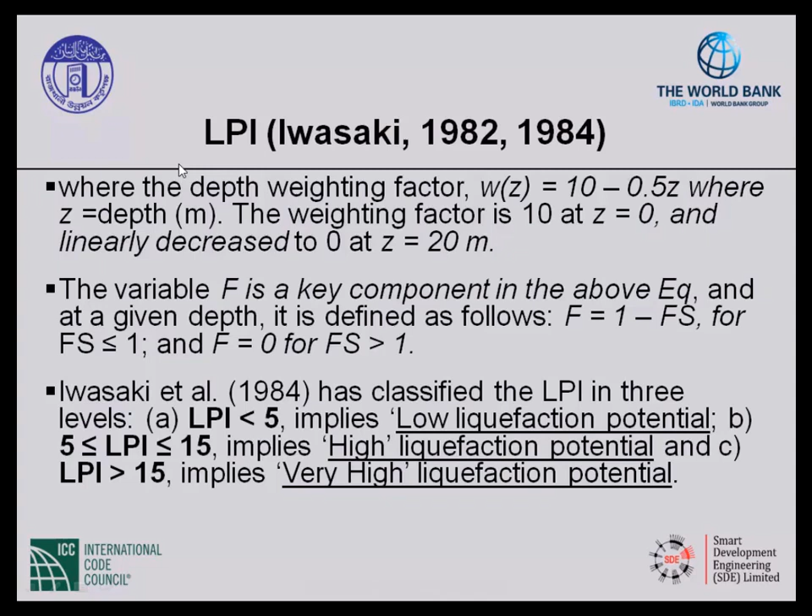This is a particular site. I have already shown the soil layering previously. For that particular site, using the simplified method, we can see from this point up to this point there is liquefaction because it is less than 1. At other locations, above 2 meters and below 10 meters, there is almost no liquefaction, using the simplified method.

For this particular site, we have used the simplified method, the Japanese method, as well as the Chinese method. The 3 methods are a little different because we need to study the sensitivity using different methods. But using the simplified method, we can see the results.

Using the Iwasaki method and classifying into 4 types, we can see that since this site is located very close to the river, and most of the site up to a depth of 20 meters is sandy soil, although beyond 20 meters the soil is much better -- more dense. The topsoil is very loose soil, so soil liquefaction is very high.

Even considering a PGA value for 475 years -- this is not even 2475 years, this is considering a PGA value of 475 years -- site response analysis has been carried out, and PGA value is around 0.23 G for this particular site.

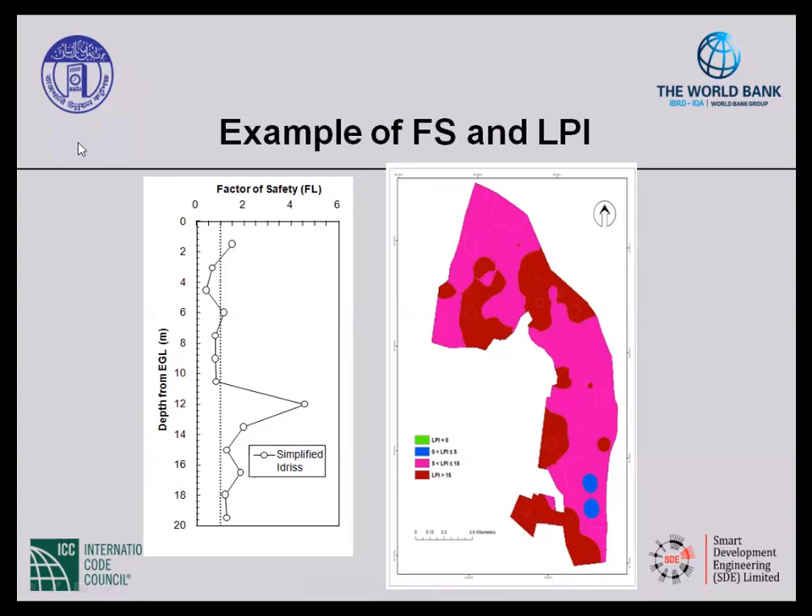What are the remedial measures? In Bangladesh, we are lucky because for the last 5 to 10 years we have undertaken so many large projects, and especially from the BUET side, we are also lucky because we are involved with almost 90% of these projects -- like the bridge project, Rooppur power plant project, and some projects along the coastal areas, which are very important projects, and we are seeing lots of soil improvement.

As Dr. Ghosh has also mentioned, we have carried out detailed engineering assessment of numerous garment industries. We found that especially in coastal areas like Chittagong, EPZs, CEPZ and KEPZ, they have structures -- high-rise buildings -- where they have put piles. But we have estimated that since the Chittagong area is very vulnerable to earthquakes, a high earthquake will not save those areas. So we have carried out assessment both for soil and buildings, and we have also taken soil improvement measures in those sites. I will share some of them.

In the mechanism of soil improvement or remedial measures, generally 4 types of measures are taken. First is soil improvement countermeasures. If your project building is not very tall and you do not have very deep soil, then you just locally improve the site, and it is the soil improvement technique.

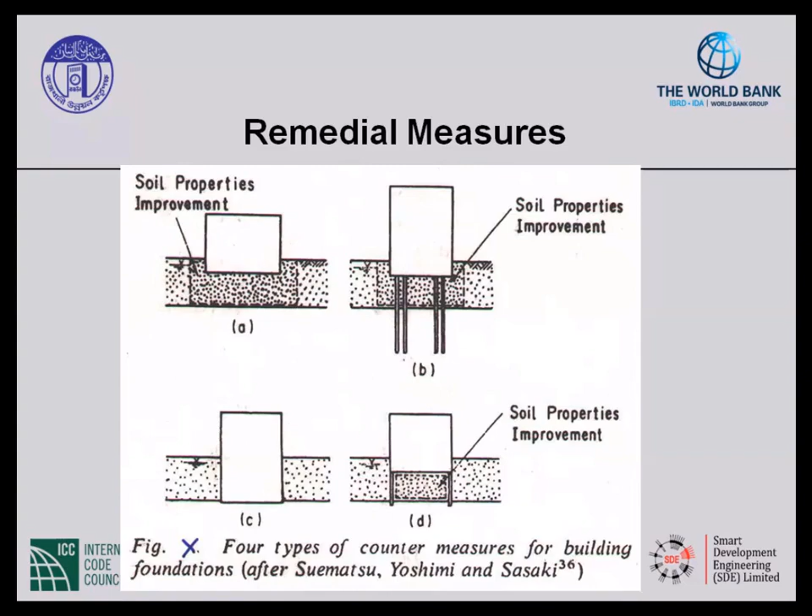In Japanese practice, they use a lot of sand compaction pile. In Bangladesh, for all the recent projects we have done, we have undertaken the dynamic consolidation technique.

Especially I'll mention 2 projects that are very important but people have forgotten. One of the old but very renowned projects is one of our very old power plants, located in Ashuganj, the Ashuganj power plant, commissioned by the Russians back in 1979.

During that time, Professor Jayat Chaudhary and his team developed the second seismic zonation map for Bangladesh. The first one was developed in the Pakistan period but published or gazetted in 1972. The second one was published in '79 based on the Indian seismic code, but their '79 code is a little different—it is not the PGA value, it has some factor called the seismic coefficient factor. So you cannot directly compare this 1979 seismic zonation map with the new one.

But that map is important because it was used for the Ashuganj project. They calculated that for the Ashuganj site, the PGA value is 0.2 G, and when they improved the soil, they used this value. This was the first important project in Bangladesh where site improvement was carried out using dynamic consolidation, or heavy tamping—in dynamic compaction, they generally use a 20 to 40 ton load dropped from a height of 10 to 20 meters several times to improve the whole site.

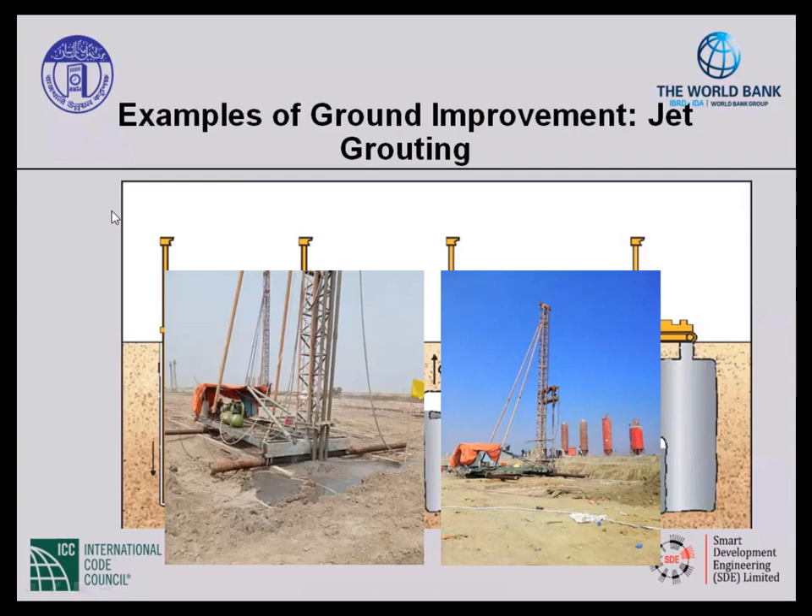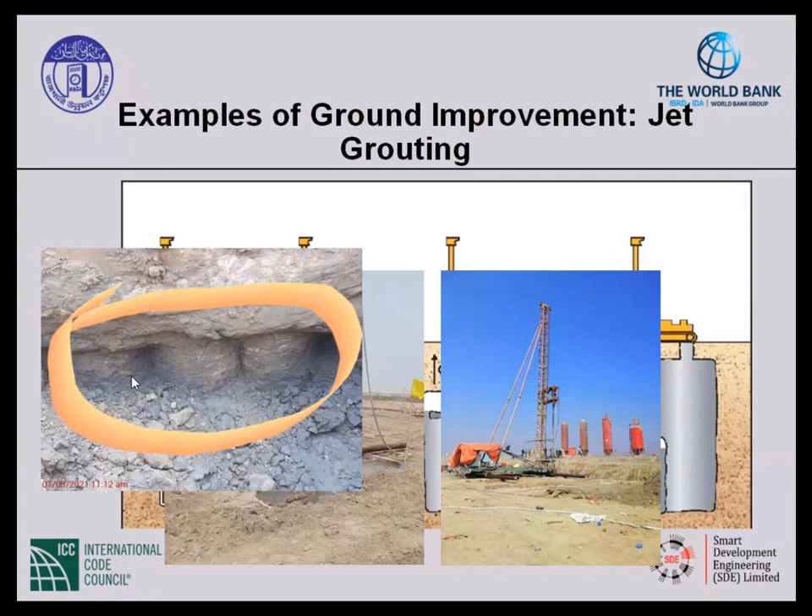After they completed the jet grouting, we asked them to uncover below the ground level, and they found these are the soil columns.

Then they measured the cement columns. Generally, depending on how much improvement is needed and how much pressure is applied, we can make a 24-inch column, or a 40-inch column, depending on high pressure.

Then we need to perform the core test, to know the unconfined compression strength of the soil mass after improvement, because we have some criteria to follow, otherwise there is no way to verify.

So we always collect cores from the middle of the column, the improved soil mass, which we call the soil column or jet column, and we take cores up to the desired depth. Generally, for some of the columns, we take cores up to 20 meters, to know the quality of the whole improved soil mass, and then we test it through the unconfined compression test to know the strength.

These are the cores collected from that particular site, and we have checked it is sufficient. The quality of concreting using cement grouting is sufficient for this particular site.

So you see, they have done the dynamic compaction at a regular interval. After completing that one, they do another in the middle, so the whole area is covered with dynamic compaction. They do this 4 to 5 times. Then they fill the settled area with sand again and compact. Ultimately, they fine tune it using a vibratory roller.

For a big area, dynamic compaction is very popular and very cheap.

One of our important projects where both dynamic compaction and PVD have been carried out is located below our MRT depot. They have spent a lot of money over there, and they have improved the soil using this method in Uttara.

This is the way the soil mass is dropped from a certain height, but where the equipment is put, the work platform has to be very strong, because the equipment itself is very heavy. It needs a counterweight of more than 40 tons if we want to drop 40 tons from a certain height.

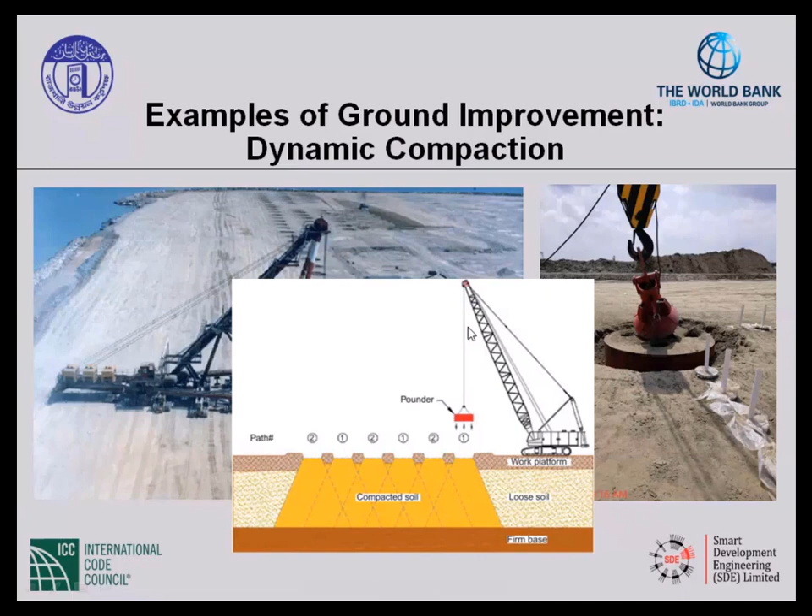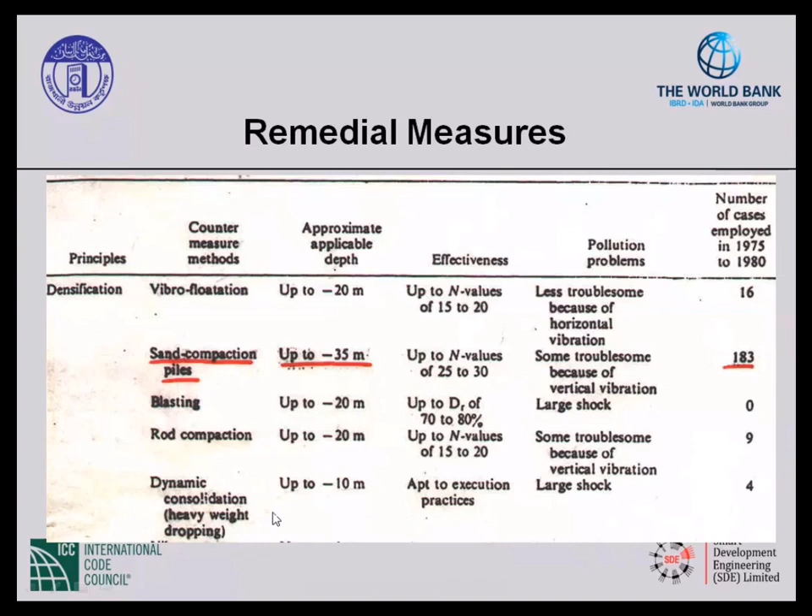Generally the soil area is improved up to a certain depth. As I mentioned in the previous table, the approximate applicable depth is 10 meters. Generally, soil improved by dynamic compaction is improved up to minus 10 meters, where the soil is poor up to that level.

Okay, then how do we evaluate this? How do we know that the soil we are getting is better than what we had previously? That means we need to know the soil condition beforehand and the soil condition after the improvement. Otherwise, we do not know how much it has improved.

For this particular site, we performed CPT, because SPT is sometimes used, but it is very much human dependent and has some error, especially if you want to make comparisons for each 10 millimeters. CPT is very precise and does not have any human interference. It is fully computer oriented, and data is all recorded within a computer, but SPT always has human error.

Since we do not rely on CPT alone, and we have a requirement that after ground improvement the bearing capacity has to be more than 80 kPa, we also conducted a plate load test over here using a large 1 square meter size plate, 1 meter by 1 meter.

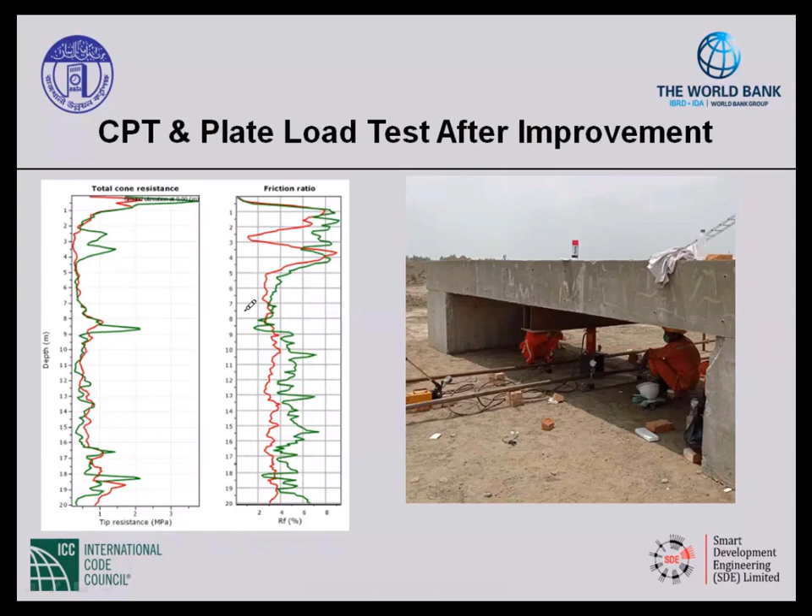After confirmation, we found that our site has improved sufficiently. You can see from the plate load test that our target is 80, and it has reached 160. So if we divide by a factor of 2, we get 80 kPa, so it is satisfied. The plate is 1 meter by 1 meter, a very big plate. Generally in our country we use a 1 foot diameter plate, but that is not sufficient. It is better to use a larger plate for more reliability.